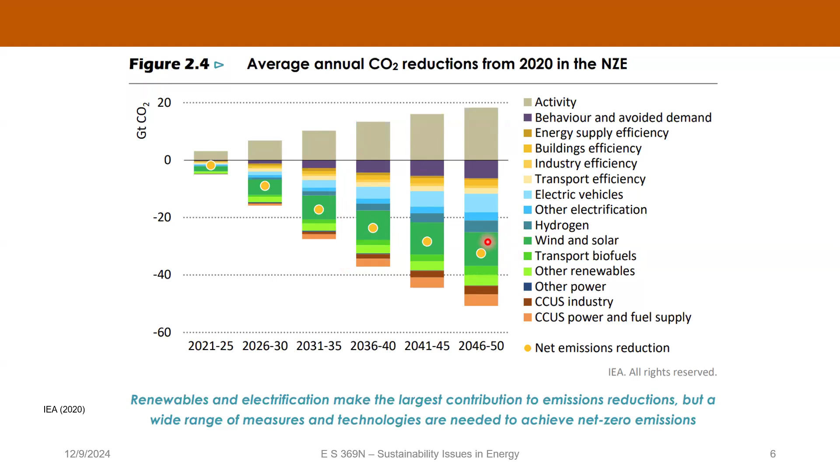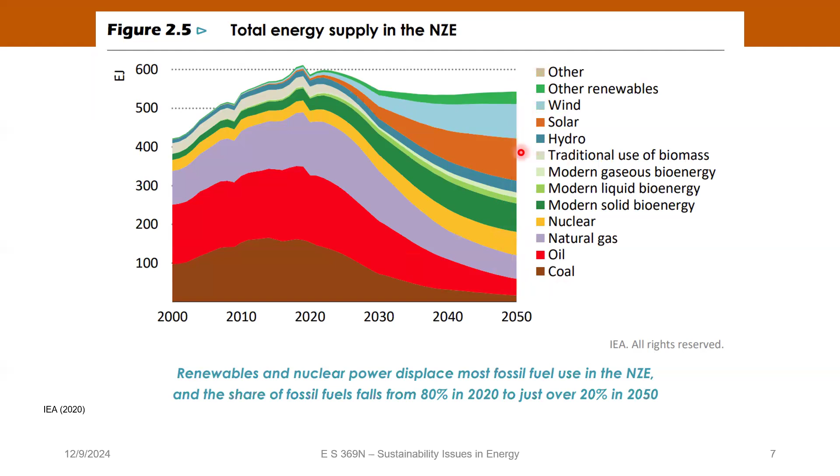And a big part of those reductions are going to come from the use of renewable energy rather than fossil fuel-based energy. So you can see that they're a substantial part of the solution. They're not the only solution, but they are in there. And if we look at their projections about where the energy supply is going to go through 2050, you can see that wind, solar, and other renewables up here are going to make up more than a third of energy generation by 2050 in their net zero scenario. So we're still going to be using, by their projection, oil and gas and coal, but a lot of our energy is going to be coming from renewables.

Okay. I showed this slide the first day of class, I think, or maybe the second day of class, but when you look at other people's projections of energy use by 2050, you can see again that the EIA International Energy Outlook from last year, a lot of their scenarios, basically you've got about a third-ish, a quarter to a third of generation from renewables. And in BP's energy outlook from this year, under their net zero scenario, again, by 2050, they're saying more than half renewables to reach net zero. So a lot of projections, and so basically they're a big part of what we need to get to net zero carbon emissions.

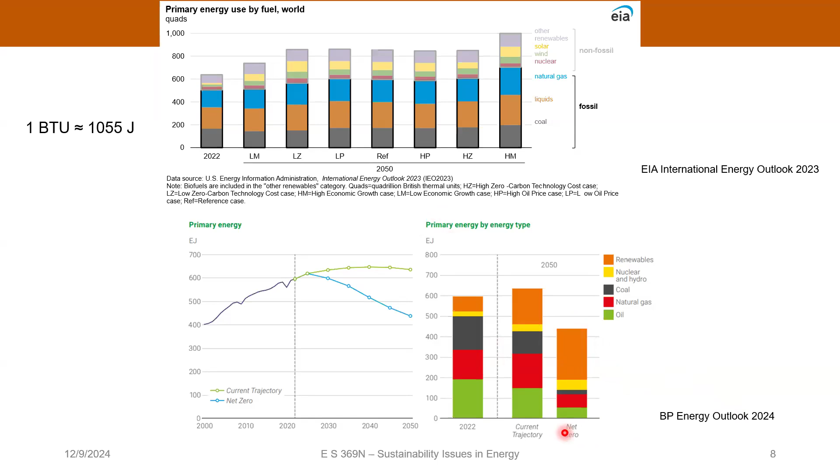Renewables also have a couple of other advantages. One of which is that they provide better energy security. So I think I made this point last week, which is that a lot more countries have renewable energy resources than have substantial fossil fuel resources. And so a good example of this is if you look at the European Union in general, obviously Norway, the Netherlands, and the UK have substantial offshore oil and gas deposits. However, a lot of the countries in the European Union do not. But what they do have is wind and solar potential because the sun is there and it's windy.

And so, in fact, this is renewable generation growth from 2021 to 2023. And what you can see is that the growth there in renewable energy has been able to supplant a lot of the loss of gas that would have been coming from Russia to generate electricity in the EU. So again, this is a way of insulating yourself from some of these geopolitical problems that arise when you're relying on other countries to supply your energy.

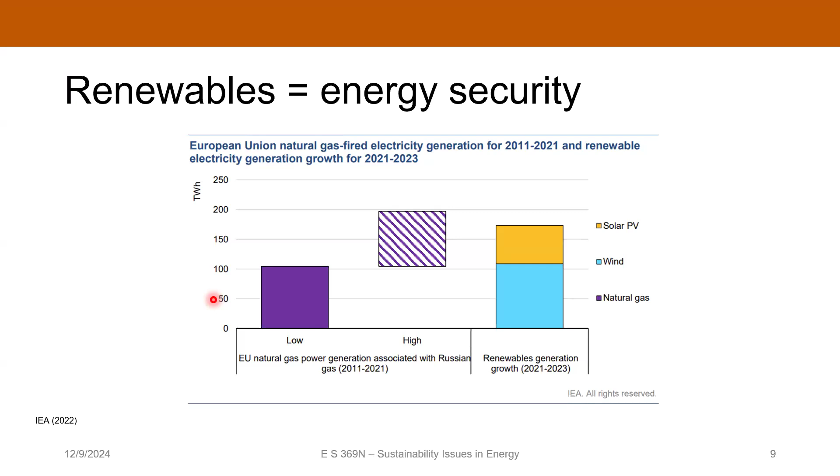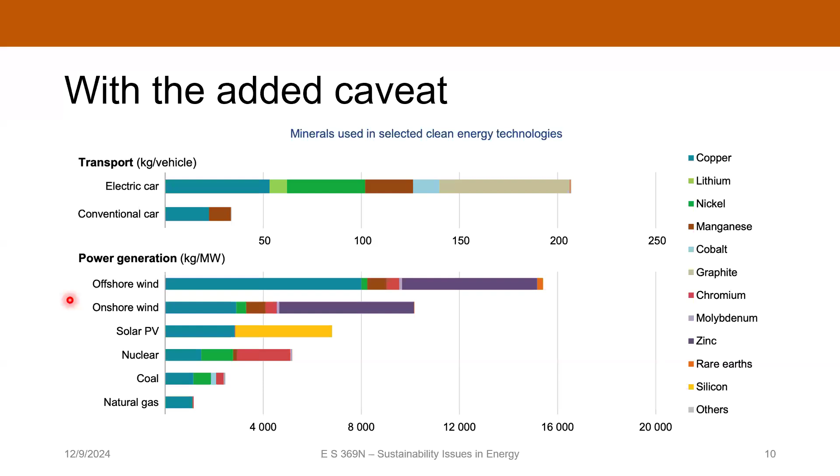And then I just got to throw this in there. Of course, we know that renewables use a lot more of these critical minerals than fossil fuels. So there is a little bit of an issue there that you have to think about. But overall, it's cheaper also, in addition to insulating you from the geopolitical stuff. So this is an interesting plot. This is looking at levelized cost of energy, and this is per megawatt hour. And it's just looking at how the price of these things has changed, going back to the late 2000s up through 2020.

And one thing you'll notice is that by 2020, coal, which is right there, and then certain types of gas generation are substantially more expensive per megawatt hour than wind and solar. So natural gas is pretty competitive, but some of these other ones are more expensive. So it also gives you access to cheaper energy.

In case you're wondering, peaker plants are gas-powered gas turbine plants that are only turned on when there's a large spike in demand. And so the reason that they're so expensive is because they're very inefficient, because it takes them a while to heat up and come to full operating capacity. And during that time, they're not operating as efficiently, so you're kind of wasting a lot of gas. So that's why these peaker plants are so much more expensive.

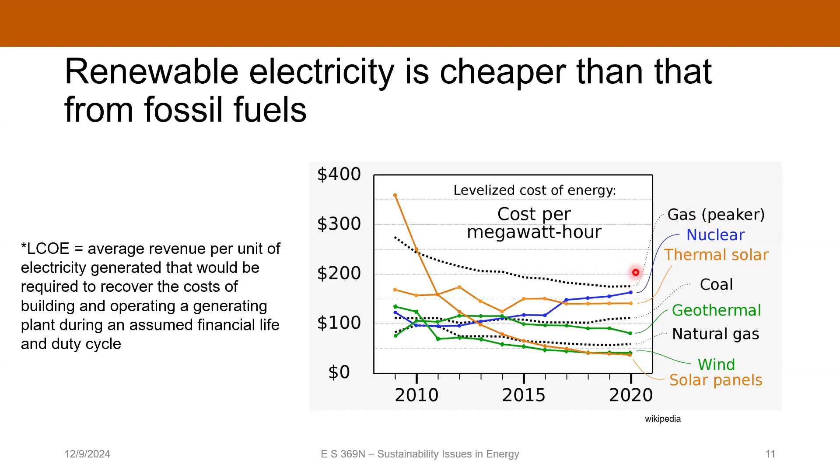Here's another plot that basically shows the same thing. So when you look at certain types of renewable energy generation, I'm going to look specifically at utility scale solar and wind over here. So when you compare those, these are cost, again, levelized cost per megawatt hour. You can see that these ones, and even geothermal, if you want to throw that in there, are cheaper on average than coal, gas peaker plants, and even nuclear to some degree, and even cheaper than the gas combined cycle estimates.

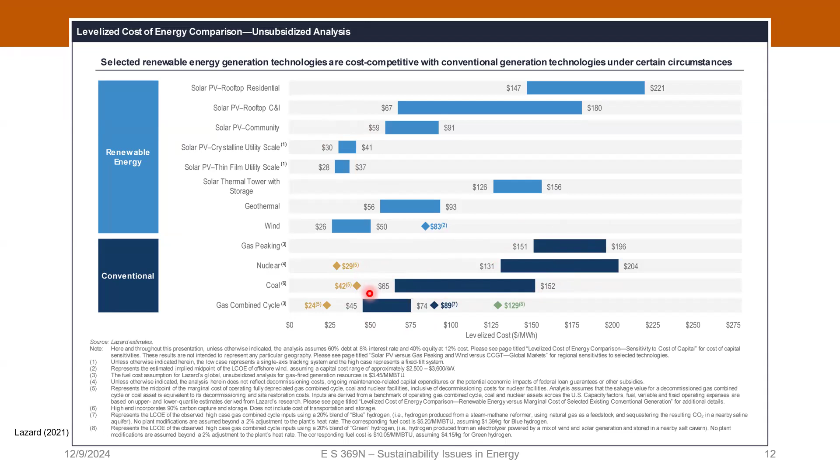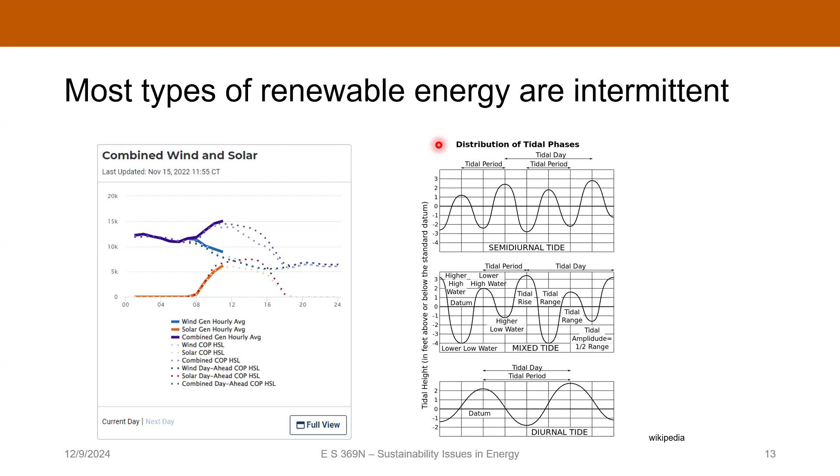Another example would be tidal energy. Okay, tides come in and go out regularly, but there are times when you can't extract any energy from them, like during your slack tide phase. So you have to deal with that if you're integrating renewables onto your electric grid.

And the best way to do this is to have some type of energy storage, so that when you have excess generation, you can store that energy. And then when you have excess demand, you can discharge the energy that's been stored. And so there's a number of different storage technologies, including mechanical techniques. So we had a good presentation on gravity storage, right? But there's other types of mechanical ones, including pumped hydro, flywheels, that sort of thing.

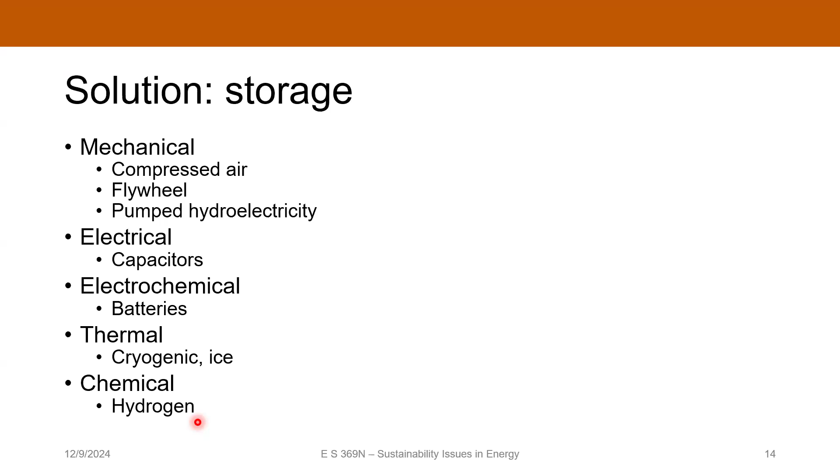There's capacitors and batteries that can store as electrical or electrochemical energy. And then there's also thermal storage in terms of ice, or you can use hot rocks to store heat. And then hydrogen is a chemical type of storage. So all these different types of storage can be integrated together to give you grid reliability if you have a lot of renewables on your grids.

And so, utility scale energy storage has a lot of different applications that you can use in terms of grid stabilization. There's also a kind of financial component, which is if you're operating an energy storage facility, you need to be able to purchase the energy cheaply, and then when you discharge it, you need to be able to make a profit. So there's kind of the arbitrage component to that.

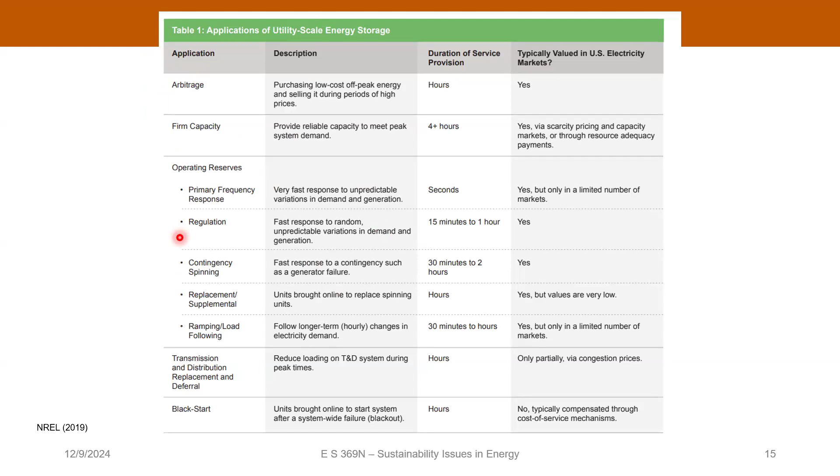And then there's a bunch of other stuff. So it's not as simple as just saying, okay, let's throw a bunch of batteries on the grid. You have to think carefully about what you're actually trying to do with that energy storage to make the grid overall more reliable. Okay, so the big issue that we currently are dealing with integrating storage onto the electric grid is the time scale of the storage and the discharge cycles.

So specifically here in Texas, a lot of battery storage has come online over the past year and a half, and a lot of them are using either lithium ion or lead acid batteries. And the problem with those is that they're really good at storing the energy, but they will discharge over a time scale of minutes to maybe an hour or two.

And so if you think about something like the power outages that we've experienced over the past few years, those last for days. And you're not going to be able to make up for that with the current battery storage we have. These are really only good for balancing the grid during times of peak demand. So like 5 to 6 p.m. on a hot day in August, these batteries are awesome. Okay, they kick on, they provide a little bit of extra juice, but that's really all that they're good for at this point.

If you want much longer term discharge of your stored energy, you need to look at things like pumped hydro, hydrogen, compressed air, things like that. That's really where it's at. And so, thinking specifically here about Texas, we don't have a lot of pumped hydropower here because, especially in Western Texas, it's fairly dry. There's not a lot of water. And so you might think maybe hydrogen might be a big part of our grid in the future. So something to think about.

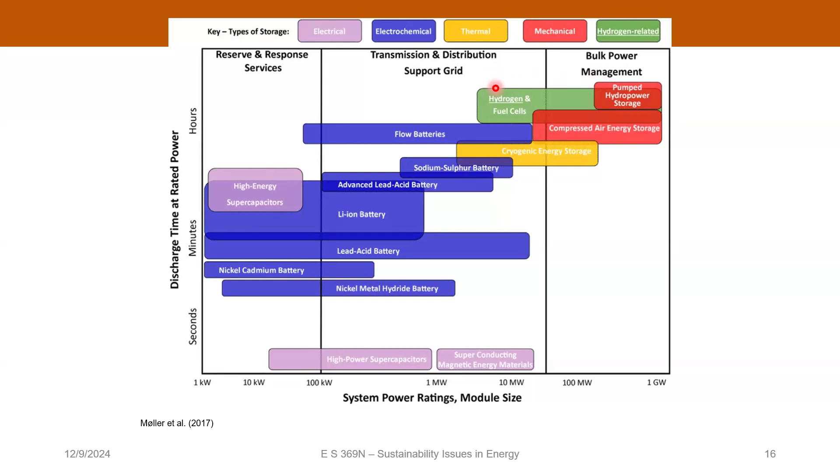Okay. So if we think about the scale of a typical US household, your power rating is on the order of a few kilowatts, right? This number has come up before. And so this kind of household scale energy storage is becoming very popular. Tesla offers their Powerwall system, which can be integrated with a rooftop solar array.

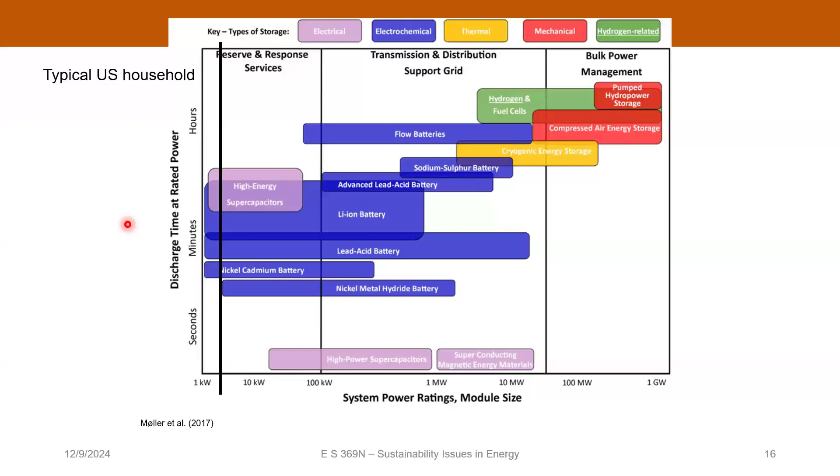Those are pretty cool. Another thing, I just read the other day about a company based out of Dallas that's going to start offering battery storage to houses where it's basically just pulling electricity off the grid when it's cheap, and then it stores it. And then you can use it for times if your power goes out, or if there's a conservation appeal or something like that. So that's kind of that end of things.

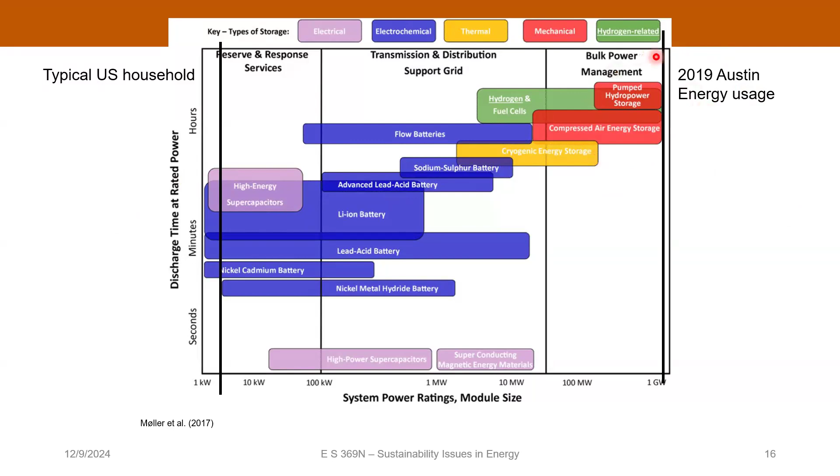On the other side, Austin Energy, which is our local electric utility here in Austin, in 2019 the usage was gigawatt scale. And so if you want to start having real utility scale energy storage, you need to look at some of these larger scale type systems.

If we remove that and look at the runners up, it's really dominated by lithium ion battery and then sensible heat. So this is thermal storage and then battery storage.

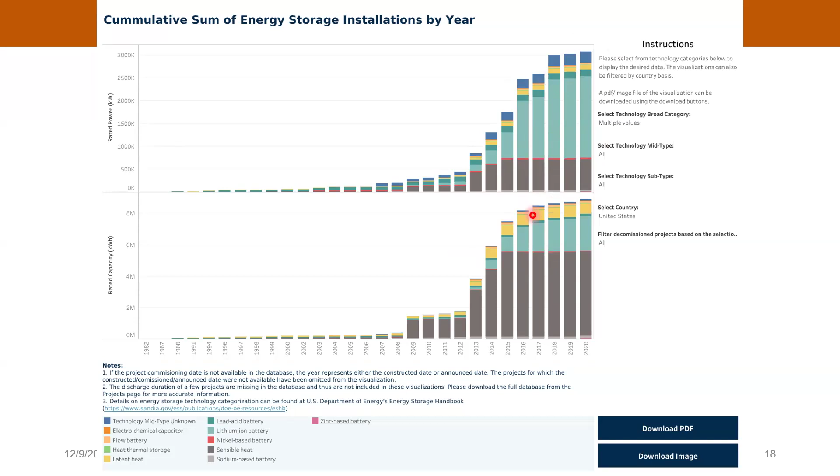So that's a lot. And you can see, particularly within the past 6 or 7 years, there's been a lot of battery storage coming on the grid. And that's been driven by advances in efficiency of lithium-ion batteries. So good stuff to look at. In the interest of time, I'm not going to go to this website, but if you're interested, you can go to this website and poke around. There's some pretty cool stuff on it.

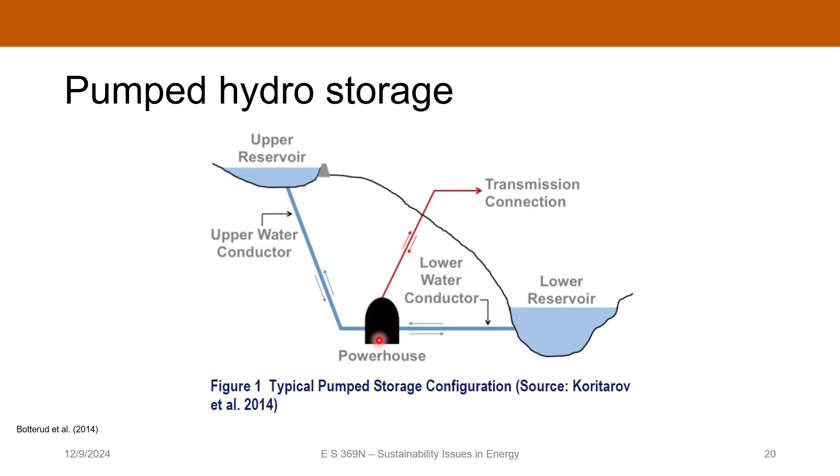Okay, pumped hydro, we'll talk about that for a minute. It's a pretty straightforward process: you have an upper reservoir and a lower reservoir. When you have excess energy, you pump the water to the upper reservoir. When you need the energy, you run it back down to the lower reservoir. And there's a turbine here that generates electricity.

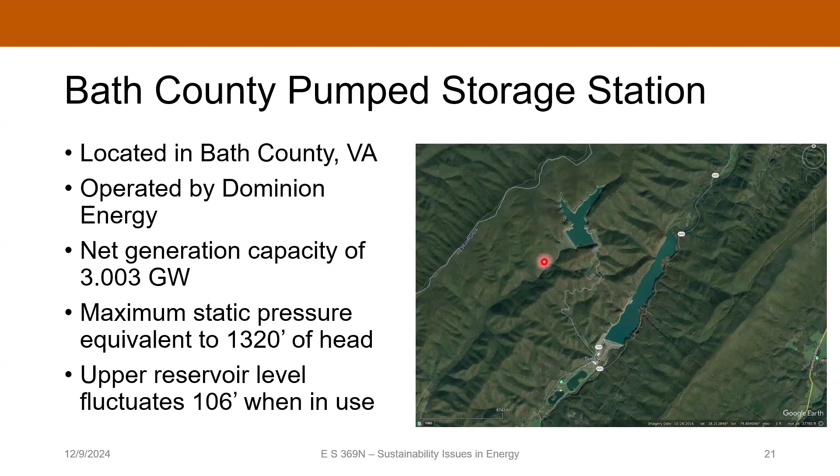The largest pumped storage is in Virginia. It's in the Appalachians there, at Bath County Pumped Storage Station. Generates 3 gigawatts. That's the largest one in the US. We had a news item, I think last week, about a much larger system in China, which I think they were targeting hundreds of gigawatts. So that's pretty big. But that's typically what we have. The elevation difference is about 1,000 feet or 1,300 feet between their upper and lower reservoirs, which you can see here. I'm going to skip over some of the technical details because I want to get to microgrids.

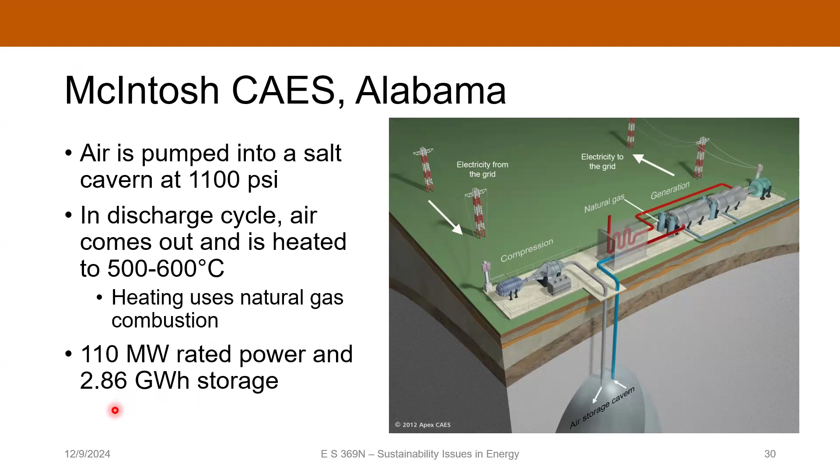Yeah, compressed air is another way of doing storage. There's a big facility in Alabama that's rated to almost 3 gigawatt hours. Something about the thermodynamics, which I'm going to skip over. Okay.

Battery storage, like I said, we have a lot of battery storage in Texas. One particular large-scale system is out in the town of Notrees. Who's been to Notrees? It's west of Odessa, and I used to drive through there a lot when I worked out there, going to and from the oil fields out in Loving County.

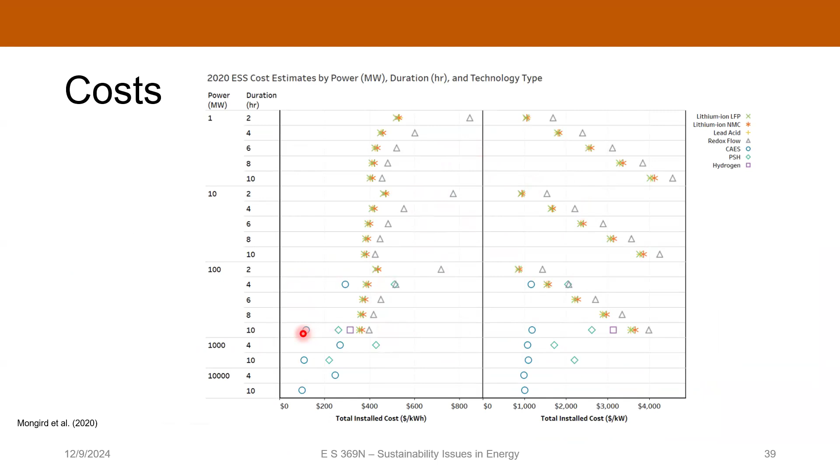Let's see a little bit on the costs associated with this. Lithium-ion is still relatively cheap. But compressed air, for the duration of storage, is actually the cheapest right now. So I wonder if we'll see more of that in the future. Okay.

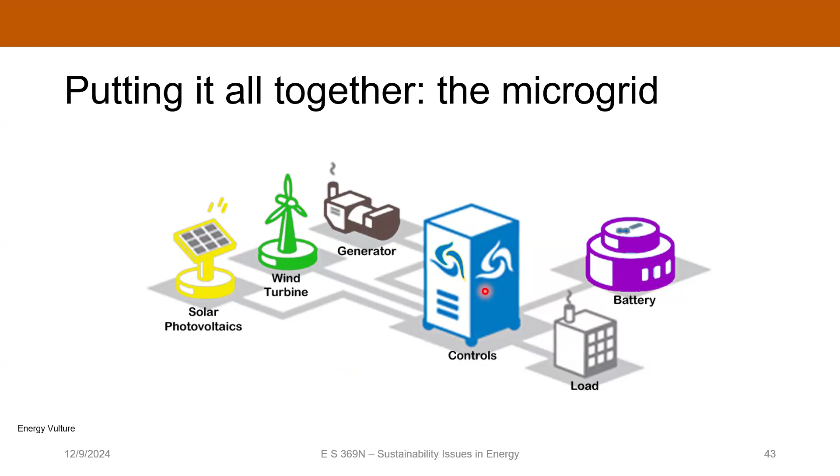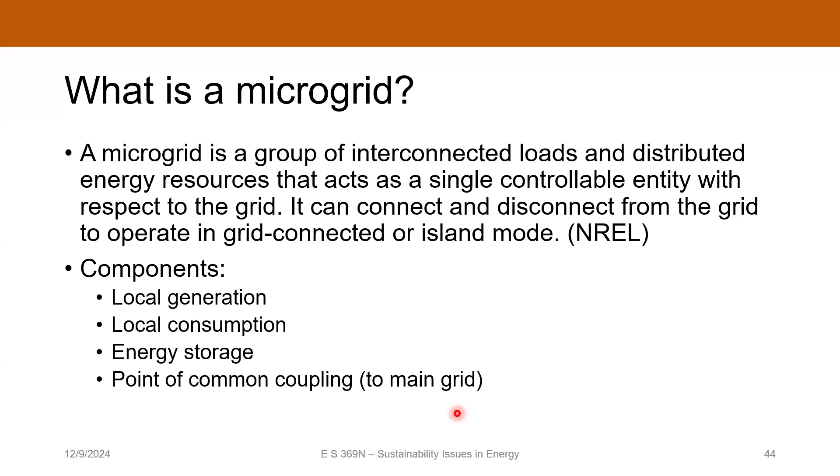So we can put all of this together in something called a microgrid. A microgrid is an integrated system of generation, distribution, end users, and storage. And this is a good way of thinking about how you can put everything together to give you reliable electricity generation. Per NREL, who sets the definitions of these things, you need to have generation, consumption, and storage locally, and then there's usually a connection to the main grid.

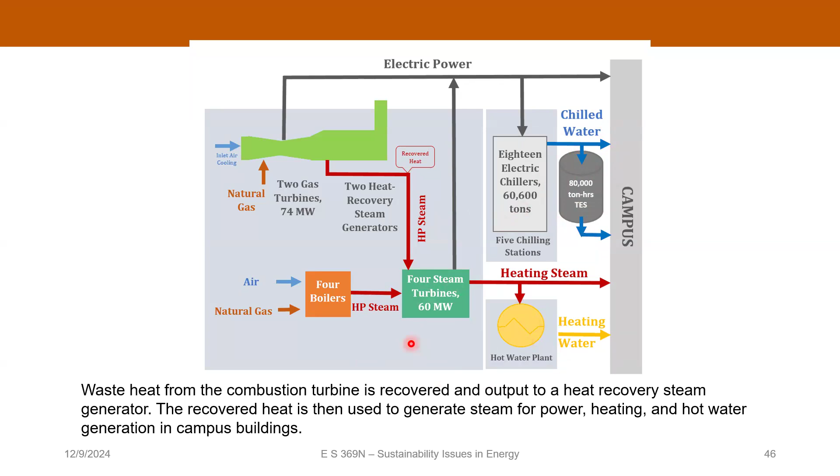And I think I've asked you this trivia question before, but the largest microgrid in the US is right here at the University of Texas at Austin. It's a pretty cool system, actually. We've got local electricity generation right across the street here, where we generate hot water, and we use some of that to distribute to campus for district heating and cooling. We have thermal energy storage in these giant drums of cold water, which I'll show you in a little bit. And then there's also steam generation that can be used for heat exchange and that sort of thing.

So the way the power plant works is that, because it's combined heat and power, you can recycle some of the waste heat to produce hot water, which then can be circulated around campus. And so that really increases the efficiency of your system, where you're only losing about 20% to waste heat. So that's how the power plant works.

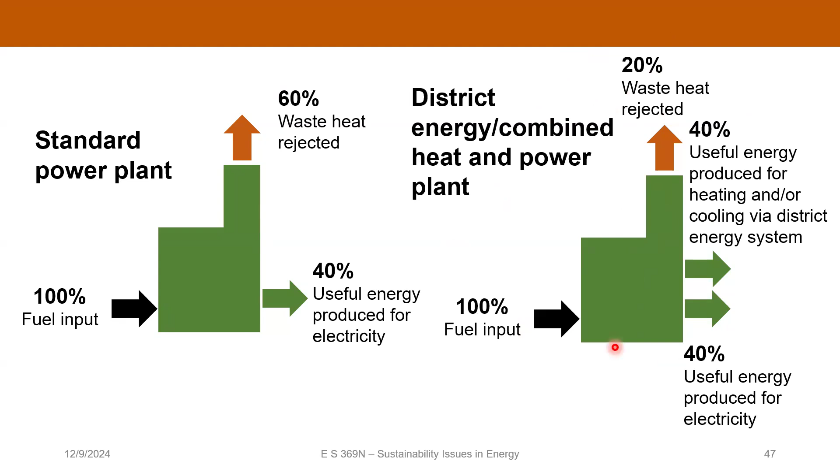I mentioned the thermal storage. You may have noticed next to the San Jacinto garage this big thing. It's a big tank of cold water. That's thermal energy storage. When they have excess generation, they cool down the water, they store it there, and then in the summer, when we need it for cooling, we can extract that water. There's another one at Red River and MLK that looks like that. So that's what those are.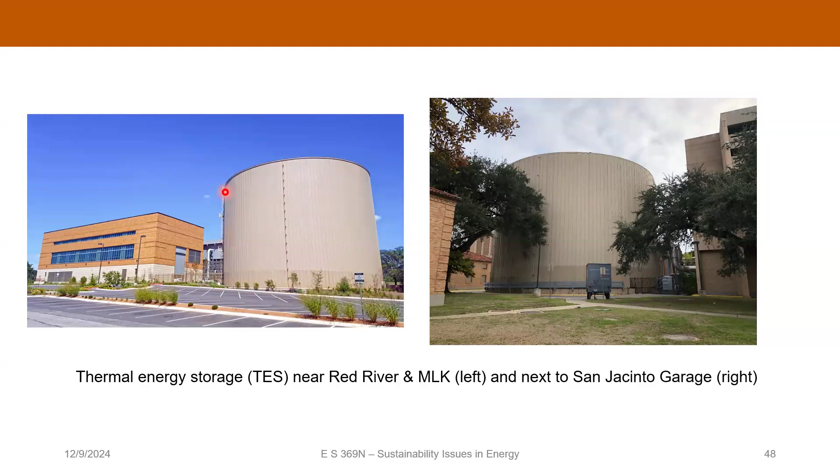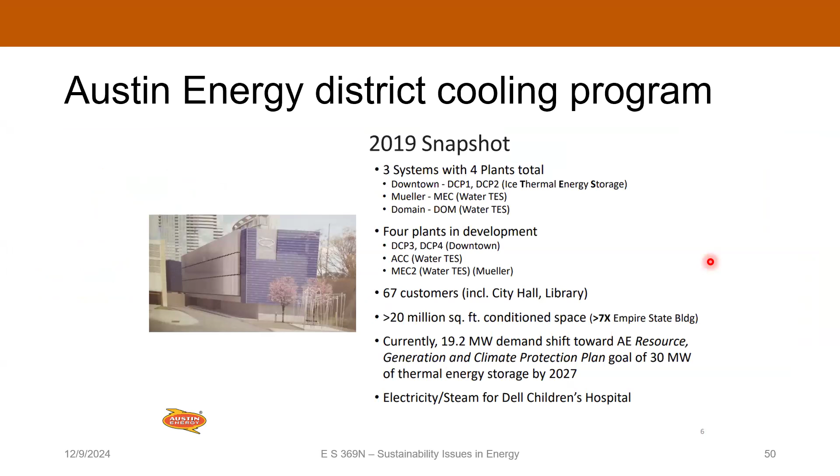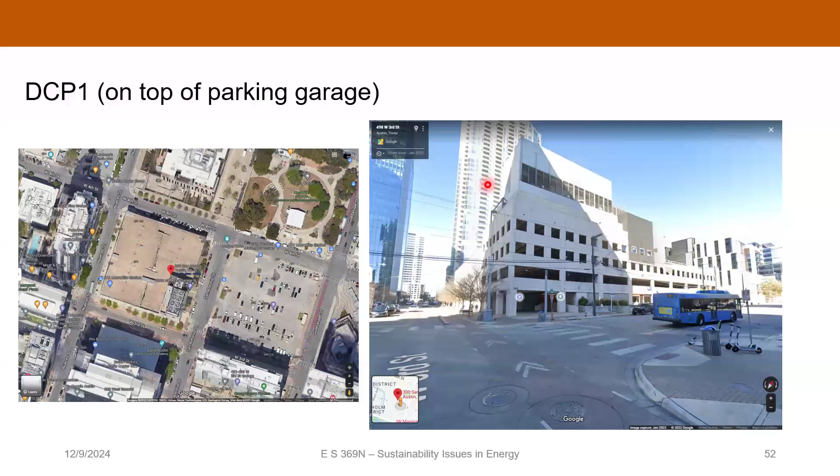CO2 emissions have been declining over the past couple of decades because they've been doing a really good job with that. Austin Energy also operates some district systems with these ice generating plants that McKinley talked about earlier. And there's several of them around town, which you wouldn't know, but they're on the tops of parking garages and stuff. So they just make ice at night and use that to circulate cold water. They have a district cooling system downtown. They have another one up in the Domain. So they're really working on it.